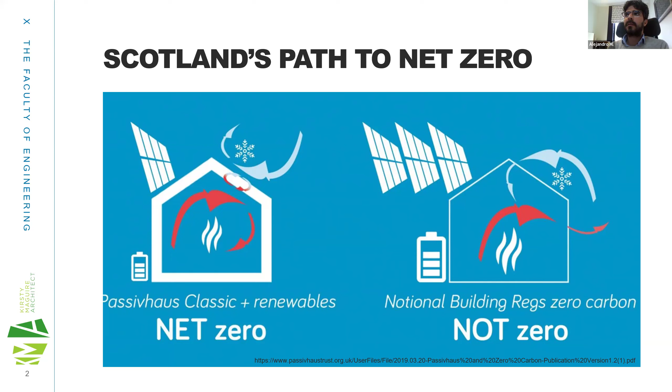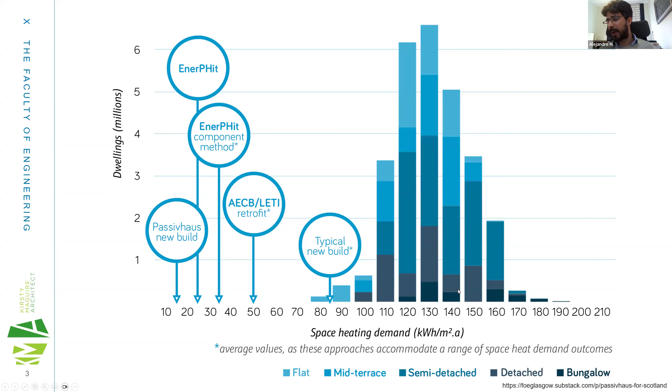Is it this one? Well, okay, so this one is just looking at what the typical net zero building might look like. So we have here what a Passivhaus and EnerPHit, which is the retrofit part of the Passivhaus, and how it compares to the rest of the UK in terms of space heating. And as we move to net zero, we need to try to reduce this a little bit.

And this is the part where Kirsty was coming in. Yeah, so you may or may not be aware that the Scottish Passivhaus equivalent is currently being determined for the new building regulations that are coming in at the end of this year. So what that looks like, we don't yet know, but that was voted in through the Citizens' Assembly with 97% of approval, and it's got cross-party support. So really keen that this continues on.

So this is in part being developed with a number of stakeholders as part of this process, including the Passivhaus Trust. So what that looks like and how it's going to be implemented is still under discussion, but very soon in the summer there'll be a consultation, which we encourage you to have a look at. And then the intention is that there's a period of time for that to embed, where you can also use Passivhaus as a deemed to satisfy in the building regulations. So that's the proposal at the moment.

What that comes out in the wash over the next 6 months remains to be seen, and we're really excited about it. So do you want to go to the next one?

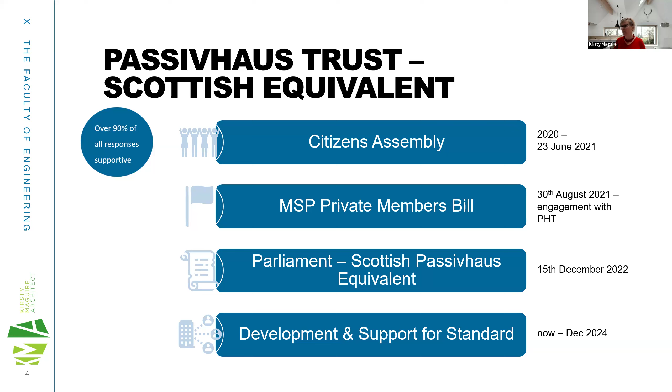So, but there are challenges. Upskilling is a key part of it, and one of the big challenges actually is ventilation, which of course has a big impact on indoor air quality. We'll be talking about how that looks on some of our projects throughout it, and also general industry upskilling. But I think the main discussion here is that none of this is rocket science, and what I like to think about it is it's evolution, not revolution. So any good contractor can undertake this work, and it is happening at scale in schools already, and it's been wholeheartedly embraced.

So there's no particular reason why this shouldn't happen at scale over the next few years in housing as well. So we're really excited about it.

That's it. Sorry, you were going to add something else?

So we have been talking about Passivhaus, but I just realized that we haven't actually told you guys what a Passivhaus is. For some of those of you that don't know, it's probably a very energy efficient house, which relies on building systems such as MVHR, mechanical ventilation with heat recovery, to provide ventilation, but also to provide good indoor air quality.

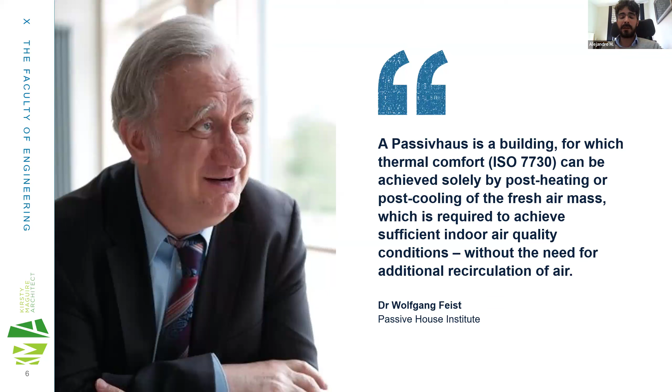And it has also other features such as the windows and doors, which are tight and provide good thermal insulation and thermal bridging. Something that is becoming more and more common in this kind of house is overheating problems. We have had major overheating problems in Scotland over the last year. So shading and solar gains are getting to be part of what we need to start looking at in Passivhaus homes.

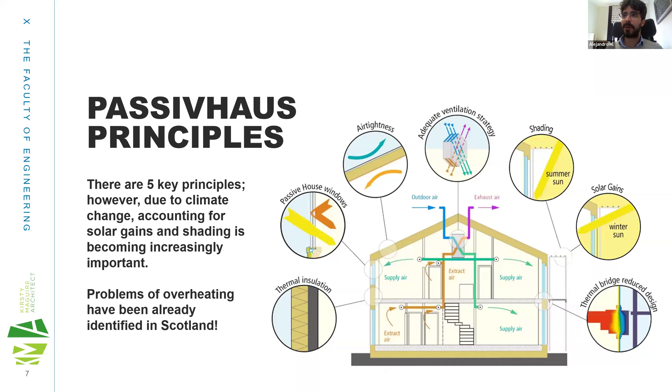I'm just going to go very briefly on this because I would expect some of you already know a lot about Passivhaus, probably more than me. But Kirsty has been working on this project, and she's going to introduce what the project is, and then I'll be looking a little bit at the indoor air quality impact on the project.

So it's a new build house, and as Alejandro just said, Passivhaus is very much about a fabric first approach. So we're really focusing on getting the quality of the construction right. And why do we do this? It's about low energy in use and high comfort.

So the comfort and health element of it is something that is slightly harder to make tangible, but I think that's where people like yourselves come in significantly with the indoor air quality review and development. And I think the other key thing is this stress testing in the modelling of buildings.

So we're looking at potentially future climate change. The sort of standard uplift that we look at as part of certification is 2 degrees, and as part of our everyday modelling. This house was completed about 2.5 years ago.

It's on a north-facing site, just outside Dundee. So we're looking over the Tay here towards the city. And often people come and say, we don't have the perfect house for Passivhaus, or the perfect site for Passivhaus, so we can't do it. This one is north facing, the views are to the north, it's semi-built into the hill, so you've got very little south solar gain, and east and west views are very limited because of privacy with the neighbours.

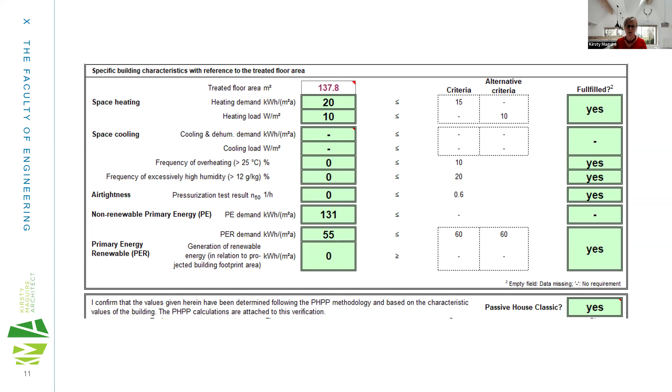And what we're looking at, because initially we're focusing on fabric, is the losses and the gains. Now you're optimizing solar gain. So another misconception is often that you're maximizing solar gain, and that's part of the issue with overheating, be that in Passivhaus or any other type of building. And of course, what we're looking at is balancing the losses. Let's just go back for 1 second.

And so we're intentionally ventilating with the mechanical heat recovery ventilation system which runs all the time. But you can also open the windows, and of course during summer you probably be doing that anyway. You might want to do that at night for night purging if you want your building a bit cooler at night. But you also get fresh air during winter, which in most housing is what we're talking about just now, but of course most people don't want to open the windows to ventilate in winter because it also lets the heat out.

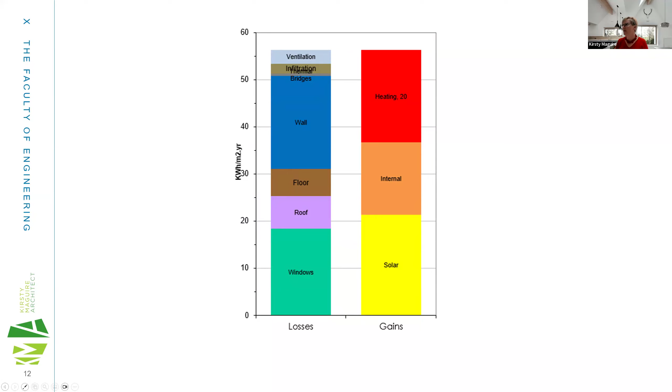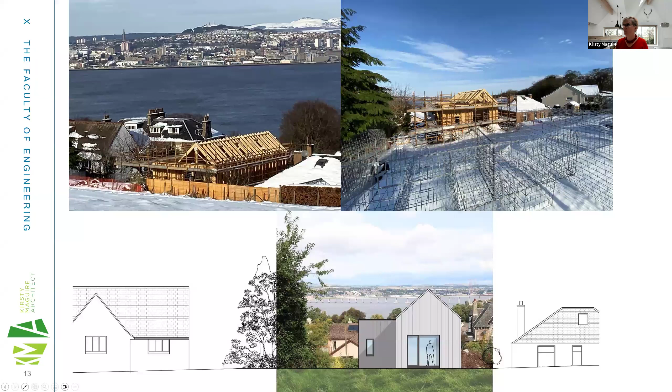So not an optimum site, but certainly possible. And this is the north-facing side. The small building at the front is very small, only 38 square meters, so it doesn't meet full Passivhaus, but it's all built to the same details, and we also have ventilation here. It's covered by the monitoring that Alejandro is doing as well, but separate to what we're talking about today.

But the house has massive north-facing windows, so technically you've got a relatively large amount of heat loss there. The key is because we're using high performance components, you're not getting downdrafts, you're not getting cold spots, and you're avoiding issues with condensation, which has further elements to consider in terms of risk of mold, health of the building, health of the occupants, and so on. That humidity element, Alejandro is going to talk about a bit more as well.

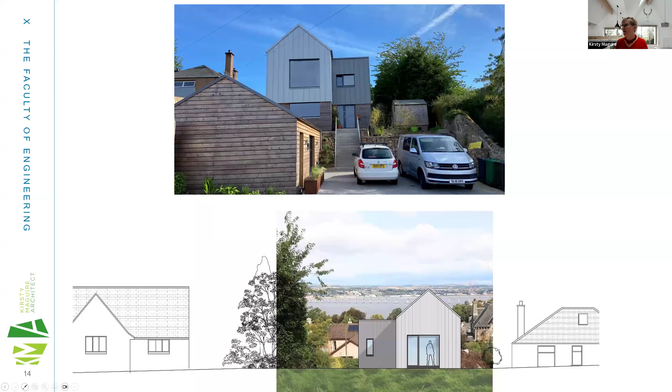So that's the building. So what we've been doing is a little bit of monitoring in this house, ongoing since the 24th of October. The data we're going to see today is up to the 31st of May. We are looking at temperature, relative humidity, and CO2.

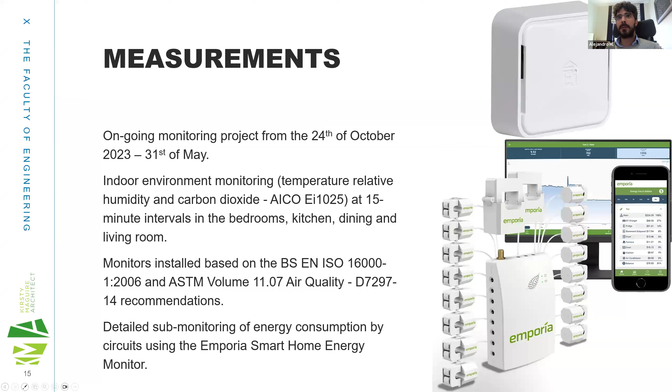We also did a little bit of energy monitoring through circuits, although I'm not going to go into a lot of detail of that today. Probably the only thing I'll mention is that Kirsty mentioned the house metered at 10 kilowatt hours. The house has actually got a demand lower than the 20 on the certification, at 14 I think it was. So the certification is 20 and 10 - 10 for the peak load and 20 for the heat load.

Looking very roughly at the first year of monitoring, which wasn't nearly as detailed as what Alejandro is doing now, it was coming in at about 14 in reality for space heating. We'll see in a moment partly why that is, but in terms of really running it, it's all modeled at 20 degrees, but the average over the year is a bit lower. That's just a personal preference of the people who are in it, but Alejandro will talk about that a bit more as well.

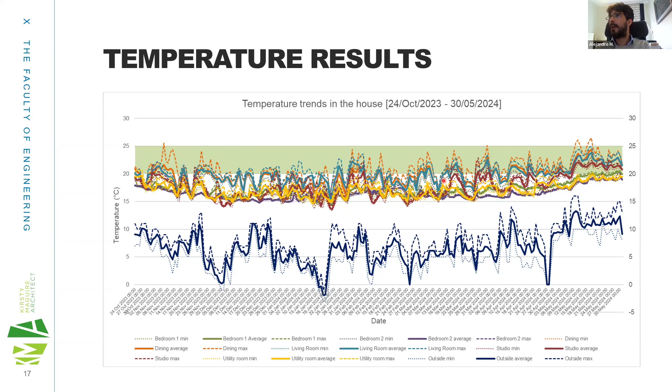And just as a very fast way of finalizing with the temperature, as you can see, the temperatures are very, very stable through all the time. We can look at that - most of the time they were under that 20 degrees we were expecting, very little above, and certainly not much above 25. However, this data is only showing winter, and what we have going through to summer, through spring - summer data might change this a little bit at a later stage.

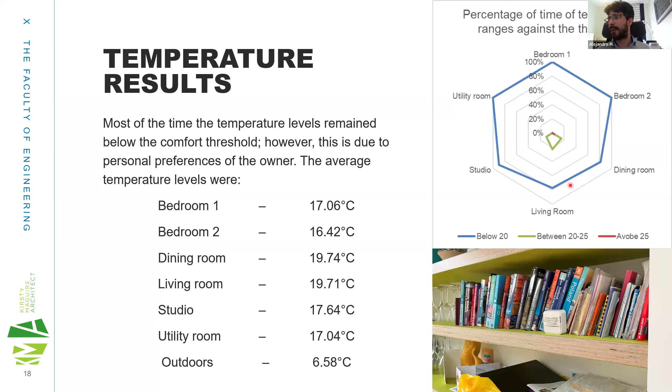And the house does meet that. There is a lot of literature and perception from people looking at relative humidity, where they believe that the passive house tends to have very dry air, and they start keeping water bowls over the radiators and that kind of stuff just to increase the humidity. But if it's well achieved with enough detail, we don't have this problem that much.

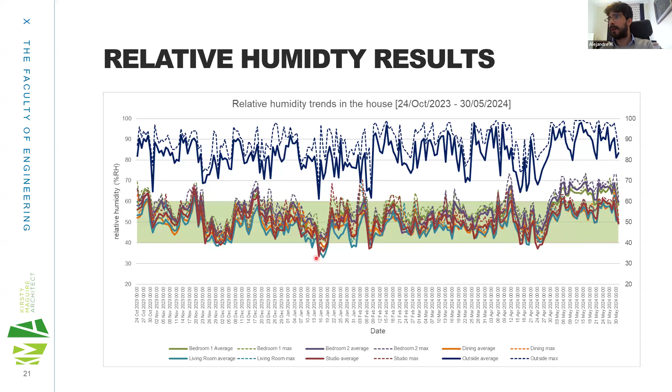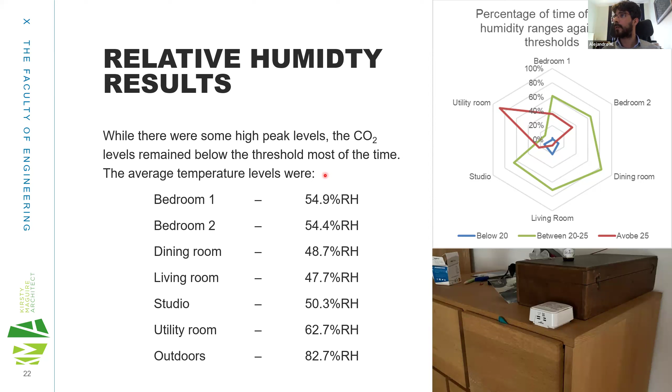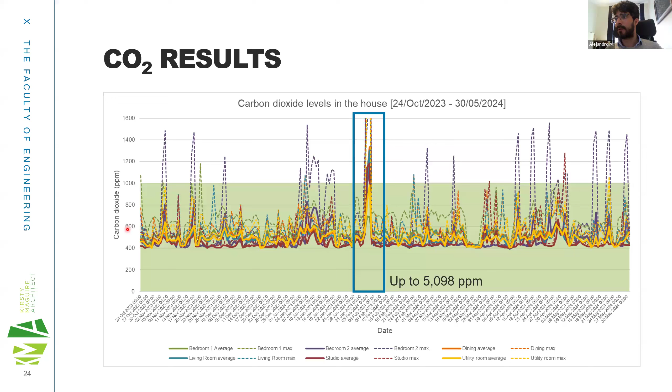We see a bit here as well in terms of how the CO2 remains on average through all the time, mostly within those 1000 ppm that we would expect. And of course, this was a bit of a peak here looking at the living room, and usually in bedroom one, where we have 2 people at night, which is normal - more ventilation there.

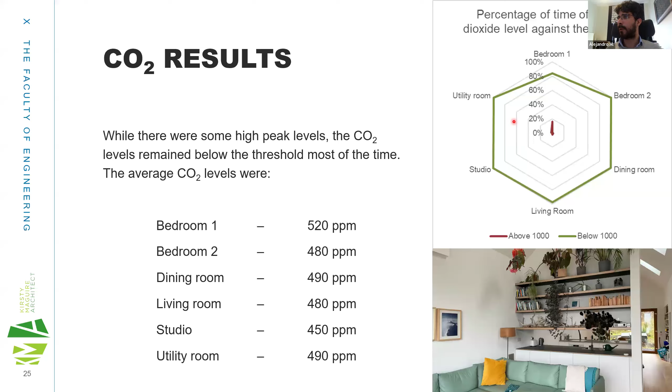So that's a bit of the challenges in trying to achieve the passive house. I'm going to pass it here to Kirsty, and what that means as well for air quality - I'll be going into detail later on that.

Thanks. So we've got a few other projects just to run through a few different elements of challenges that we look at and how that impacts what we do, relating to indoor air quality. This is one of the very first passive house buildings in Scotland. It's one of ours, and in terms of design it was based on a hay shed, pretty much the same colour and shape as this.

And what you'll see on any of the drawings is a red line, and that continuous red line is the air tightness layer. The key for this intentional ventilation is that the air tightness layer is continuous, well detailed, and well installed. So what we're looking for is a maximum of 0.6 air changes per hour at 50 pascals, both pressurized and depressurized, so that we're not getting drafts, which leads to discomfort and heat loss.

But one of the other things we're looking at is thermal bridges, making sure that we're not leaking heat in the same way that you might leak air.

In this evolution, not revolution process, you still occasionally find people keen to do strip foundations. I think this is the kind of thing contractors will only do once, because by the time you insulate anything that involves wall ties, that's a good time to stop doing it and design something different. There's always a discussion, and what's really important in all of these is the collaborative process between contractor and architect, and the rest of the design team for that matter.

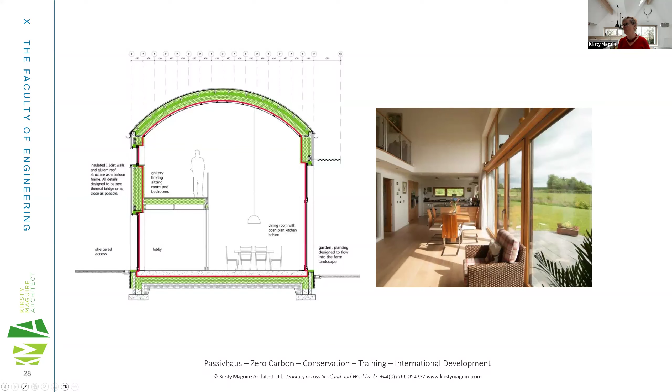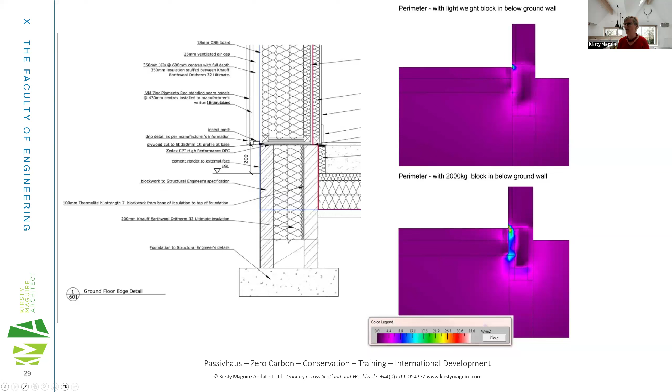So the upshot now is that we design all of these out. At that point there were very few products available in the market, and the contractor, they were ready to take on most things, but that was a step too far for them. However, having done this, they realised that actually they should have gone that way as well.

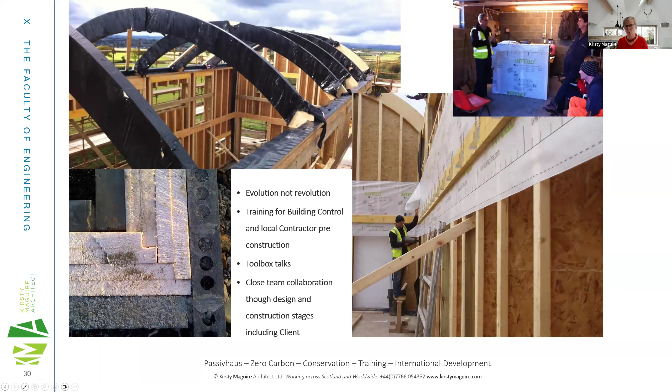So now typically we'd use a raft foundation - we've got an image of that further on. But in terms of air tightness, that needs to be thought about even as the structure is going up. It's not something that can just happen later on. The design and testing of that needs to be thought about right from day one in the sketch designs, particularly on larger projects where you've got multi-unit housing or larger projects such as schools, because there's the practicalities of testing as well. It's possible to do an entire large building, but often because of sequencing in the construction process, it's far preferable for contractors that you're doing the buildings bit by bit.

The other thing in terms of design that we need to think about is how complex the building is, because regardless of whether it's Passivhaus or not, complexity equals cost, and every client has a budget. What we want to be doing is spending the budget on good quality design, but also good quality execution of that design - the actual construction.

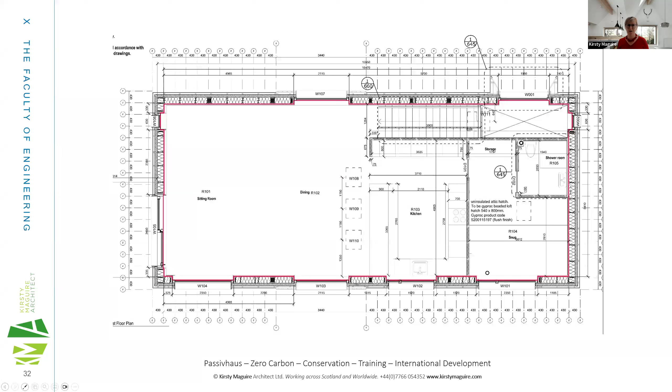So this is a project in Dundee. And in plan, it couldn't be much simpler. It is a box, and that red line is your airtightness line.

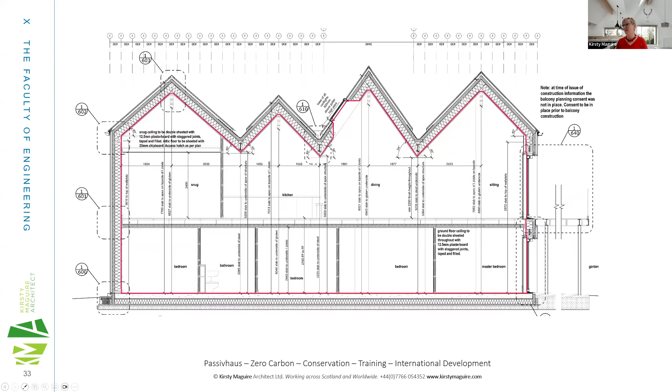Look at the red line for the airtightness. The whole thermal element of this is a discussion for a whole other day, but what we're doing here is minimizing the risk of thermal bridge for continuous insulation, while also making that airtightness line really simple to build, or as simple as it possibly can be.

The other key thing is using appropriate materials. There's a QA process on site that needs to be managed by a contractor, to make sure the sequencing is right, but also to make sure all the people on site understand the importance of not damaging that airtightness layer. That's something new, and that's part of the upskilling.

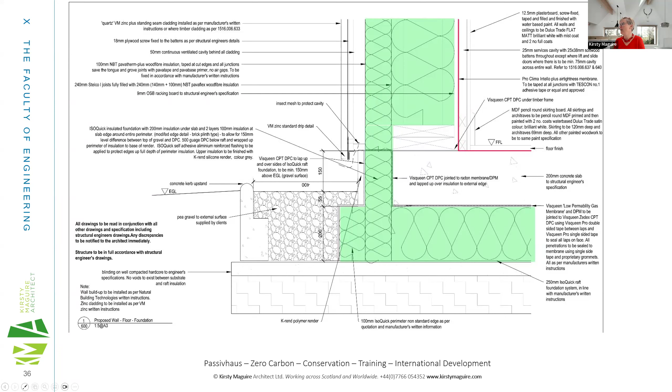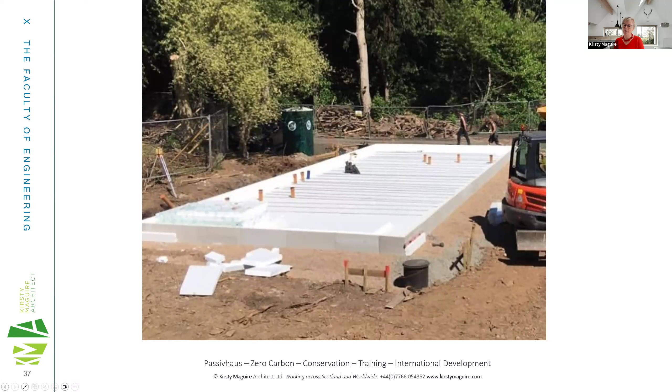This is a raft foundation, the sort of tray that we mentioned, so it makes all of this a lot more simple to achieve. These kinds of products now, you've got a choice in the market, and they're easily available.

Thinking about mid-floor detail, sometimes you don't need to make that much of a change to a detail to make it work, and sometimes actually it's easier, quicker and less costly to make a bit of a jump. In this case, there are lots of ways to do a mid-floor, but here what we're looking at is actually a balloon frame, putting in that airtightness layer before you put the mid-floor in. So again, sequencing is really important, highlighting that kind of thing to the contractor.

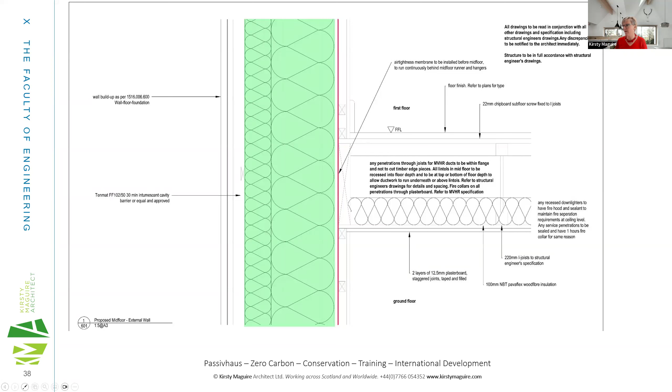This is another house, up near Forres. The client asked for a traditional farmhouse. We talked through what they were looking for, and we developed something still inspired by a traditional farmhouse, but slightly more contemporary, open plan, light and bright design, but also designed for extension because they're a young family.

The idea is they could easily add bedrooms on the other side of the building - all the windows are where you'd put doors. Those windows can be taken out and reused, and you don't have to make structural changes to the existing building to do that kind of extension. So we think a lot about some of these other elements of long-term sustainability as well when we're working.

So how do we test this? Again, this was a little while ago, so products - this comes down to product claims - and the market is rapidly changing. As designers and contractors and people checking and researching these buildings, I think it's really important to understand that the claims suppliers are making are not always substantiated or tested yet.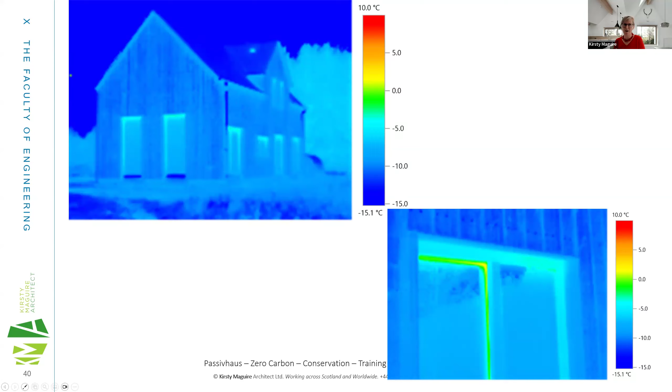I'm sure you're all familiar with thermal imaging, but it's super helpful for us, both in terms of assessing the building, but also good contractors we've worked with have really embraced thermal imaging as part of their own internal checking. They're checking the work the guys have done so they can make sure what they're building is what we're expecting, what the client's expecting. So good contractors are using these tools rather than having it foisted upon them, which I think is really interesting.

This particular building was managed on site by the client - clients who are very capable of doing that. But one of the things they chose to do was reduce the specification of the ventilation system. As we upskill in Scotland in the housing market, ventilation is a big area where there just aren't enough people working in this zone in the construction industry at the moment. This was a typical example of where that was down-spec'd a bit.

But looking at this, we went, hang on, it's still not as good as it should be. So they subsequently recommissioned it, and this improved.

I think it shows very much the value of monitoring and evaluation, but also, as we're upskilling, that's one of the big challenges we're going to have, particularly in this area. Of all the different things in upskilling and changing regulations, this is one of the things identified as key to address through the transition period to Passivhaus equivalent, whatever that looks like.

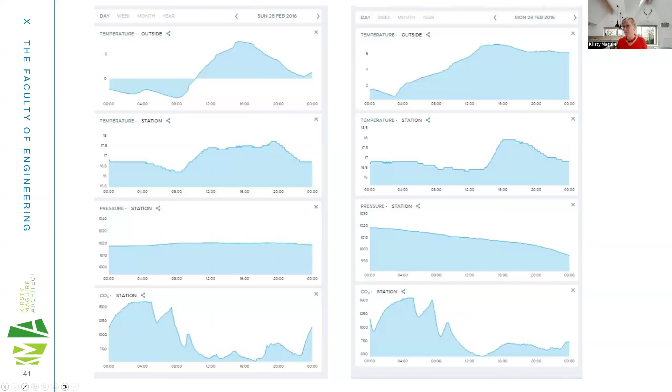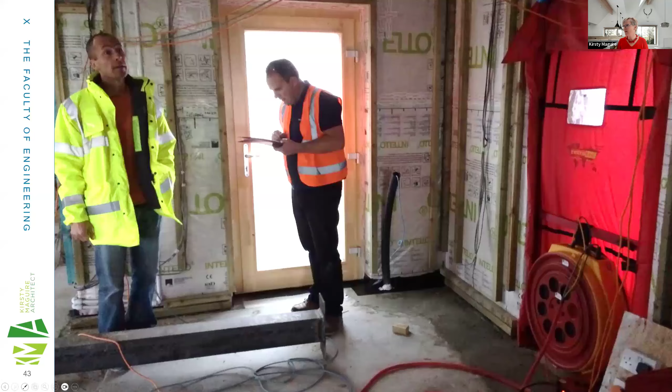Then airtightness testing. There are various different ways to airtightness test. I imagine we may end up discussing different airtightness testing later on, but typically what you do is bring along a blower door testing kit and pressurize the house. For Passivhaus, you need to depressurize it to find all the leaks.

You can't have everybody on site, because you can't open doors as you're going around - it needs to be sealed for the duration of the test. But it's really fantastic to have the key people from the contractor team there, including the joiners and the timber frame people, because it's the only really visual element they have of why this quality is so important.

We've had people at the start of the test say, well, I like to do a good job, but I'm not really fussed about all those tiny little bits of taping or making sure it's spot on. By the end, an hour or two later, they're completely into it - we really enjoy having this validation of their skills, that they can do a good job and it's immediately recognised. We've had quite a lot of feedback from contractors that building to this level of quality gives them a real joy in their work.

So actually the interesting element of that comes down to mental health and job satisfaction - people are building it, as well as those who get the building at the end. There are all these elements to good quality building, in this case Passivhaus, that we didn't really expect to come out of it, but through discussion with contractors as well as end users of the building, you get this bigger picture.

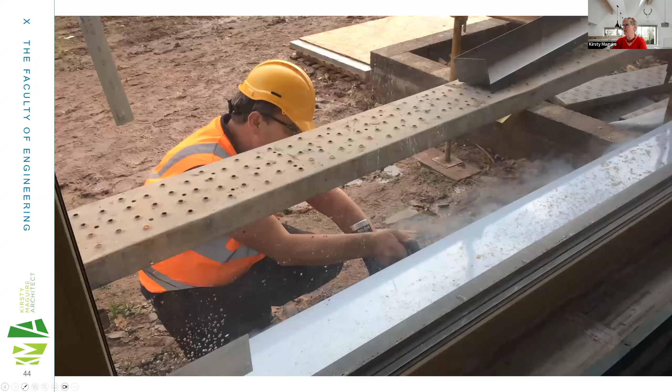Next. I imagine many of you have seen an airtightness test in progress, but just in case not.

You don't always have to use smoke like this, but it's very useful for in-depth testing. We put smoke against any area we think is high risk of having gaps in the building, and the building is depressurized. So what we'd see is smoke coming through if there was an issue.

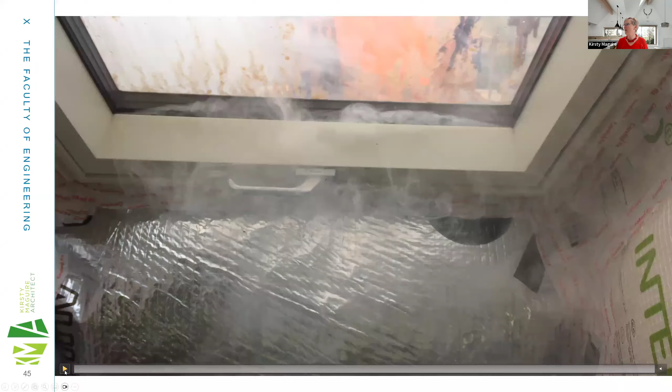In the next slide we'll see - this one worked really well. There are two elements here. One, they'd run out of time and materials, so there was a lot of smoke coming through the building fabric and into the room. Also, we discovered there were some weep holes in the roof light, which was a Passivhaus-specified roof light - that's what you see there with the smoke coming through.

The reason for that was because it's very unlikely in triple or quadruple glazing that you're going to have condensation on the inner face - you're much more likely to have it on the outer face. But that was almost a hangover from the design of the double glazed units, in terms of design and iterations of the product. That may have been changed now, I'm not sure.

It's really interesting looking at how these products are impacted. In fact, on another project we discovered there was an issue with the seal when we were testing the building, and the window seals all failed. We fed that back to the contractor and further to the supplier, who were very good.

I have to say they were super about their response - they said they'd changed the way the window panes were put in at the factory, and through this they realized there was a potential risk point where most of the windows were fine but some were not, and we had a bad batch of windows. As a result, they came and fixed all the windows without any issues whatsoever, and also changed their system in the factory.

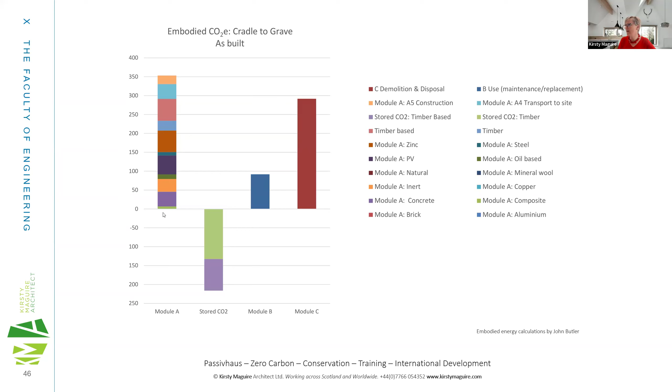We also look at a whole range of other things - recycled materials, reclaimed materials, avoiding cement in one particular project which we finished recently. If anyone's interested in finding more about this project, it had loads going on in it, and quite a lot of research work done along the way. It's also in a wooded area, and we're looking at quite a lot of biodiversity, so loads of depth to that.

But if you're interested, look online at Passive House Plus magazine. I can put a link in the chat later - it's in the current online magazine, and will come out in paper soon as an in-depth article about this.

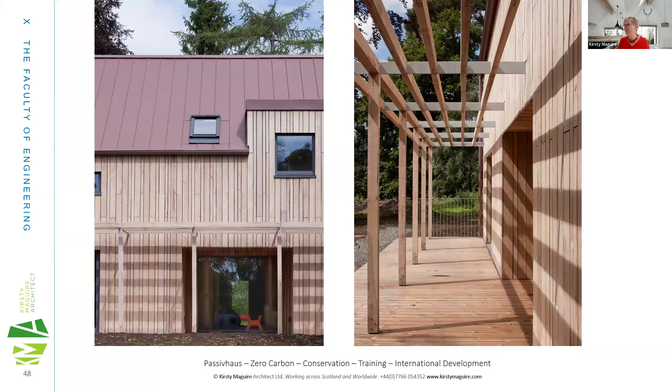Really, your architecture can be what you want it to be. But one of the other key things is that the ventilation plant is considered very, very early on in the design to enable that to work effectively - something architects were trained not to think about, as essentially someone else's problem, but clearly that's not the case.

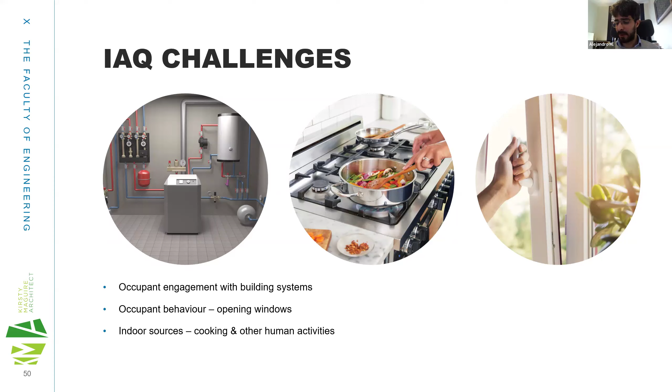That could play both ways - if you open the windows and you live on a very busy road, well, you are going to let in outdoor pollution. But that is the other place for the MVHR system, which we'll see later on as part of the benefits.

Kirsty was mentioning that while there is not much interest in part of the passive house in looking at the materials that we're putting in, not only as building materials but also as furnishing, those can produce certain levels of off-gassing. So if we don't have enough conscience, or if we haven't designed the house with natural materials, for example, that off-gassing can lead to something quite extensive at a later stage, particularly once they are new - they have a couple of weeks, even months, where the off-gassing is quite high.

The pollution peaks as well, usually because if we don't open the windows in the passive house, we have a pollution peak, and then that pollution peak will take a lot of time to dissipate through the mechanical ventilation that we have. It could be that we could just open the window to avoid that, but it usually doesn't happen, and that's something we need to manage.

That's as well part of the engagement with the system. We could boost the MVHR system to avoid these kinds of things. And finally, we have indoor sources. Once we've started reducing other sources of pollution, cleaning and personal products, for example, can play a big role in terms of those indoor sources, for example VOCs, that can lead to other kinds of problems.

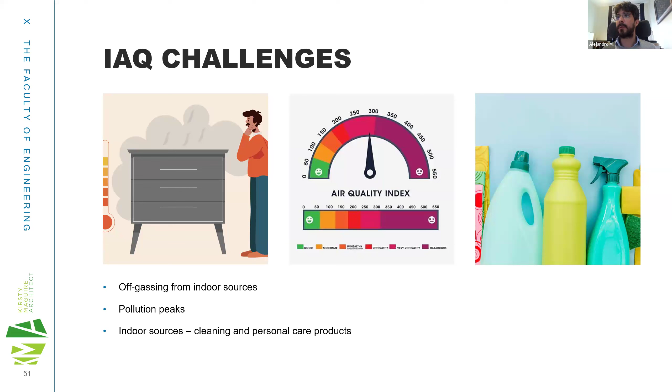The other one is looking at having those levels of comfort. As Kirsty was mentioning earlier, people who move into Passivhauses have an expectation of comfort, but they just discover that once they're living there, that expectation is actually exceeded in a way.

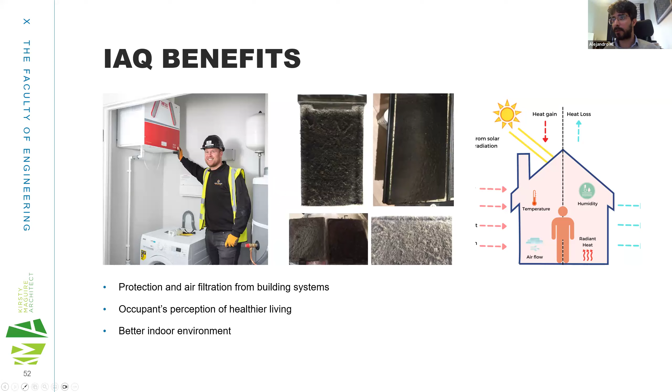The other bit here is that we have a more controlled environment that we can play with or do what we need to do if we know how to work the building systems. And the other part we saw through that very quality detailing, and how to reduce the thermal bridges, that's quite important to start looking at how we can reduce the risk of mold.

But the other part that will help us reduce mold is the constant ventilation that we'll have in the house. So compared to a normal house, a passive house will have constant ventilation most of the time. It could be that in a normal house, we don't have as much ventilation as we'd like at some points, and that can lead to these kinds of problems.

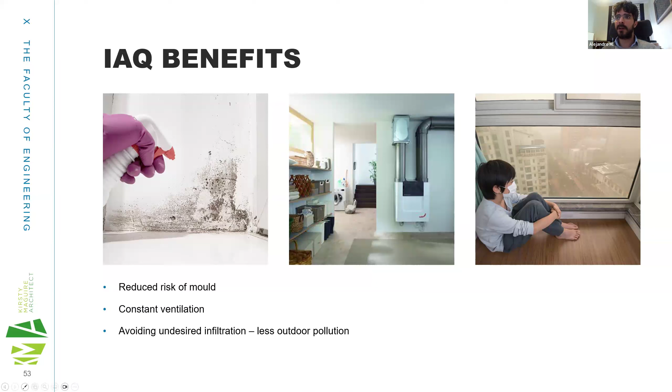So this is just here looking at how an MVHR looks in a utility system in a house. And finally, the point to make is protection from whatever is outside. Towards avoiding undesired infiltration, we can also protect from pollution outside coming in. We have the MVHR system to help us with that, and that's something quite important and different in passive houses.

So some of the key learnings we've been getting through here: I think airtightness is part of the key, but as well how we detail the building, and I think Kirsty has made a very good job of making that point. We have intentional ventilation on the ventilation systems and openings.

And as well, we have that perception of the occupants of the house that is increased in terms of not only air quality, but also the indoor environment in general. Finally, we have some perceived comfort of indoor air quality versus what the national average would expect in terms of comfort. I don't know if you want to go into more detail on any of these points, Kirsty, or we just open the Q&A session.